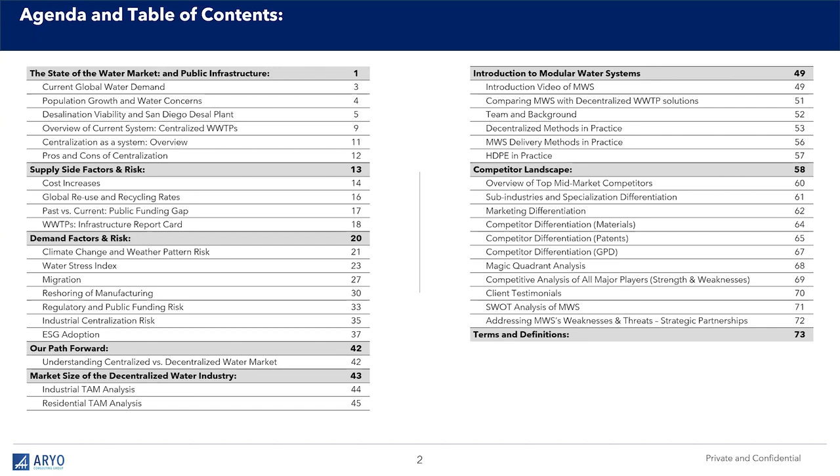Let's take a look. Water use is increasing at exponential rates. Water consumption is outpacing population rates. Why? Well, the fastest rising usage is in manufacturing. Population is growing - you can see at the bottom here that we've gradually gone from 2020, 8 billion, and the growth is slowing, but manufacturing is growing fast. You can see how agriculture has actually been dropping in terms of overall share, domestic only growing very slowly, electricity use growing somewhat, but manufacturing really taking off. So that's really the area of highest demand, and of course, it's where we're operating.

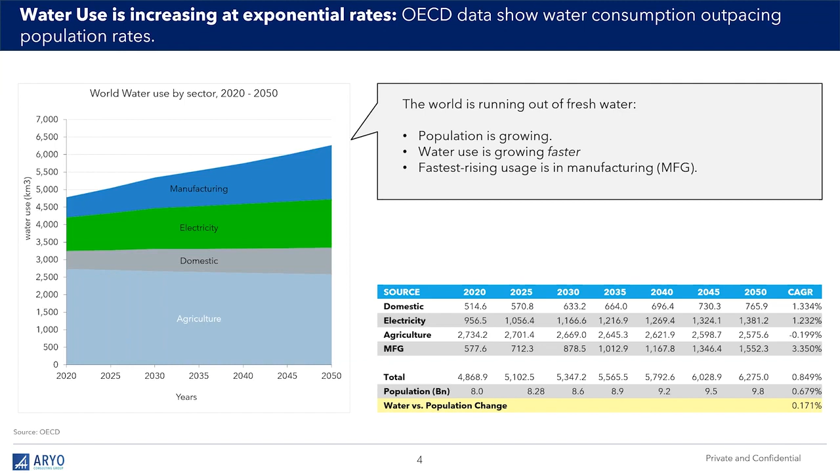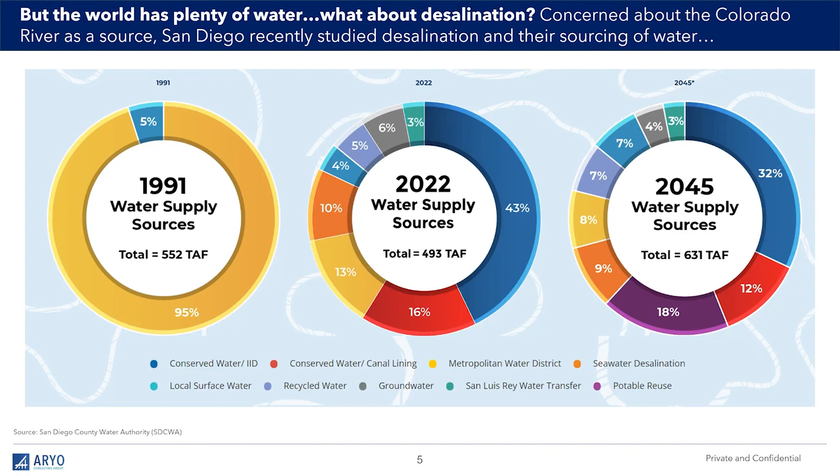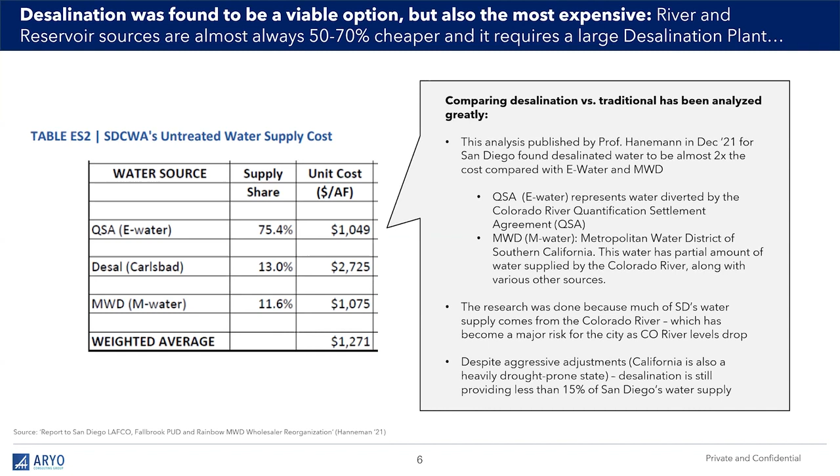However, here's the issue - the cost is very high. This slide says desalination is still providing less than 15% of San Diego's water supply, despite aggressive adjustments. As you can see, the cost per acre foot, that's 1 acre, 1 foot deep, is more than double for desalination versus Metropolitan Water District or QSA, which is the Colorado River source, which is 75% of the system. The desalination plants are very capital intensive. Here's the Carlsbad - it cost $1 billion to build, and it costs $100 million a year to run. We can't have dozens of these, not easily.

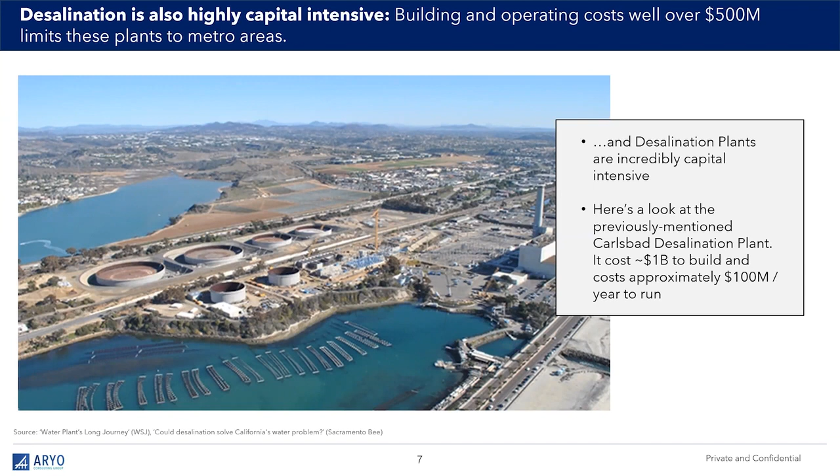Well, we can, but the federal government's not spending money on water, and states don't really have the cash. It really only works for Middle East and North Africa states, where they're both wealthy and drought prone. You see, Saudi Arabia has a huge percentage, UAE, Qatar, Bahrain, Kuwait - they're all big users. They can afford it, and they have a desert, so that works for them. Plus, I might add, they don't have a NIMBY problem, right - not in my backyard. The Huntington Beach desalination plant that was worked on for a decade was then canceled because of neighborhood problems. Well, that's not a good business model, right? So that's desalination - it's not a simple solution.

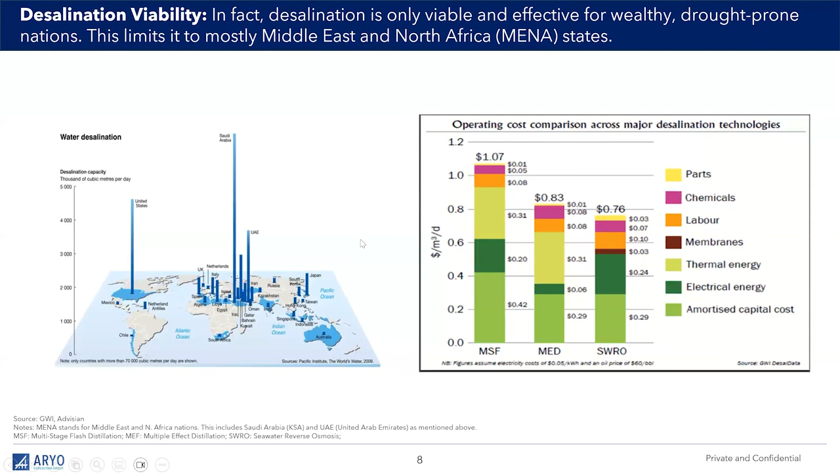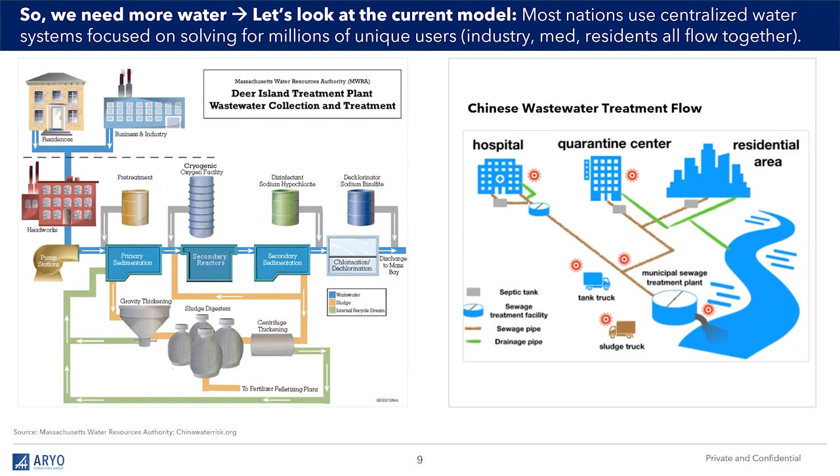There's better options - like, for example, what about recycling? We'll talk about that. So we need more water. The current model is centralized. I'm not going to go too deep into this, but basically everything flows into a municipal sewage treatment plant, and that kind of solves it for millions and millions of users - resident, industry, etc. This is the complex process, tried and true, adopted standard for all water treatment, and it's very stable. Remember that back when we first got into water, we started using a technology coming out of the algae industry, which is solids extraction, meaning originally algae extraction turning into sewage extraction.

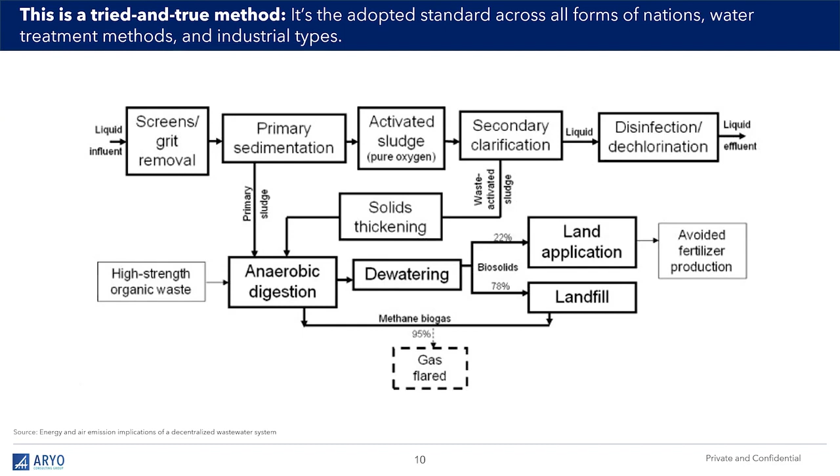We were technology focused, and we found that the water industry is very happy with this. They don't need new stuff. They're like, this is fine. And that's why we had to go to a more market-driven model.

Now, centralization comes at a cost. Why? Well, the direct costs are less, but they don't adapt to change, and they're very fragile. And that's where we see these things like Flint, Michigan, et cetera.

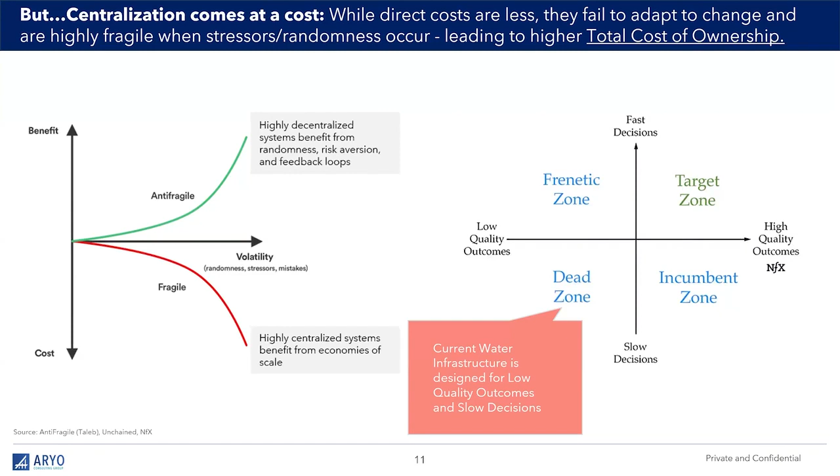What you get is this magic quadrant on the right here, showing that current water infrastructure is designed for low quality outcomes and slow decisions. So yes, on the left-hand side, highly centralized systems benefit from economies of scale, but they're very fragile. Whereas on the highly decentralized system, you benefit from randomness, risk aversion, and feedback loops. Basically, you have fast decisions and high quality outcomes. And frankly, when it comes to public health, that's what you want.

This goes on about the decentralization versus centralization mix. Again, centralized is theoretically lower cost, but decentralization is more responsive to market needs. So you see that the more you decentralize, the more you are responsive, right? Centralization's cost benefits stem from having one touch point. However, anything that naturally requires many touch points ends up costing less via the decentralized process.

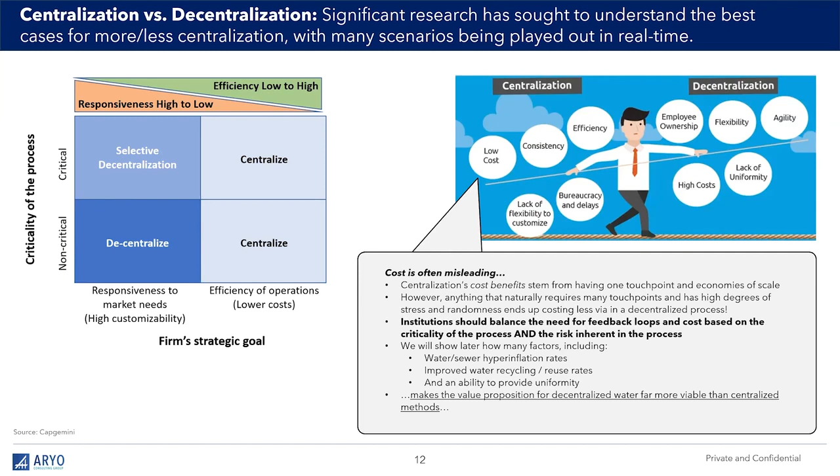Factors like hyperinflation rates, water recycling, and an ability to provide uniform standards makes it much more viable to go decentralized. All right, let's take a look at water centralization, of course, is the big model.

And this is what's called a Pareto distribution. The Pareto principle states that for many outcomes, roughly 80% of consequences come from 20% of causes. Like, for example, 20% of your sales force generates 80% of your sales. That's kind of the same concept here.

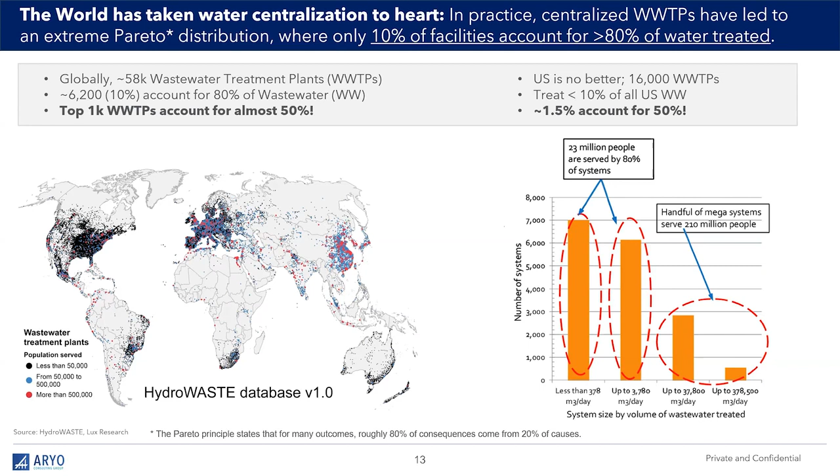Worldwide, we've tended to build very large centralized plants. Look at China with all the red dots. Look at Europe, America. On the right-hand side, America, at 1.5% of all plants account for half of all water treatment. And 23 million people are served by 80%.

Here's what's going on. Up 200% since 2000. And I've been talking about this: college tuition and fees. Literally, water and sewage rates are now exceeding college tuition and fees in 2023.

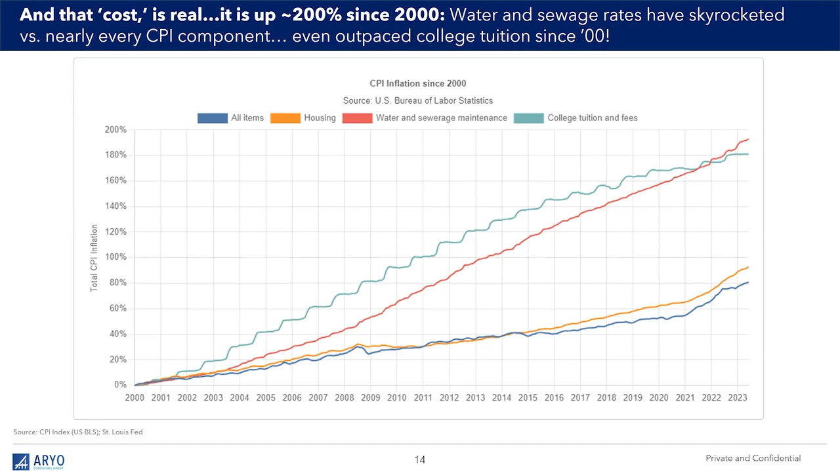This is insane. This is a bit technical, but basically it gets into the typical use, which is you don't see much reuse. There are some planned reuses, but the de facto is basically what actually happens, which is a very small percentage. I'll get to that in one second.

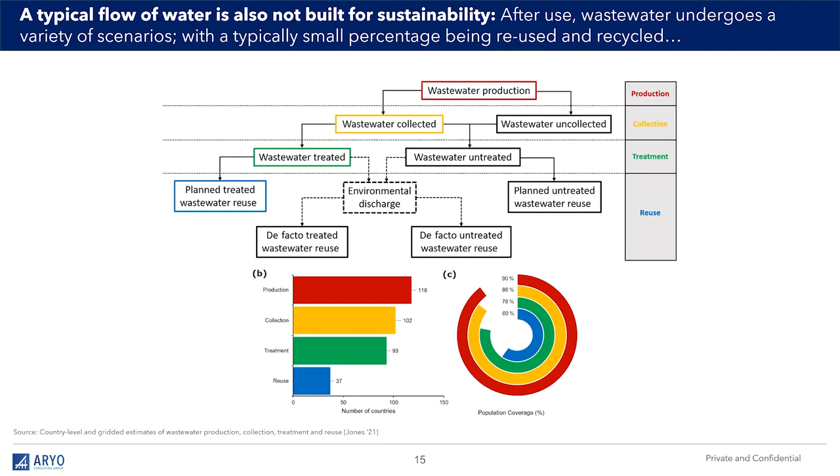This is a bit geeky, but it's kind of fun. This is the water recycling. Look at this. The black column is the internal freshwater resources per capita, and that is how much water is available and used by individuals. So Australia and the United States are very high, but look at the white squares, that's how much they recycle. Look at the United States.

Whereas if you look all the way over here at Israel, very low water usage, super high, 80% plus on the water reuse. That's the correct model. And they've achieved it.

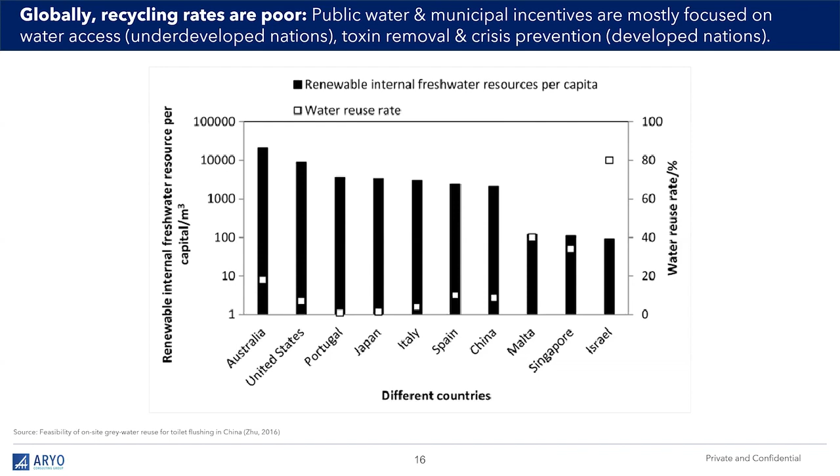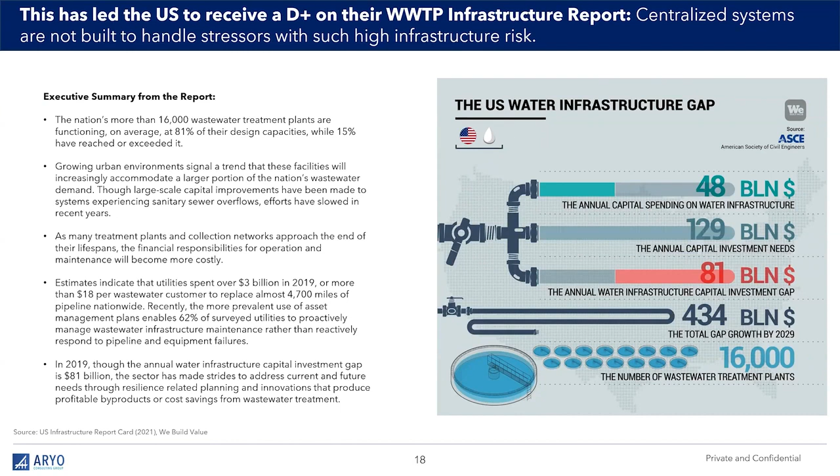Five major supply concerns - we'll get to the demand concerns. The five major supply concerns are centralization, single point of failure, massive increase in cost, less than 1% recycling, and a crumbling infrastructure given a D+ score.

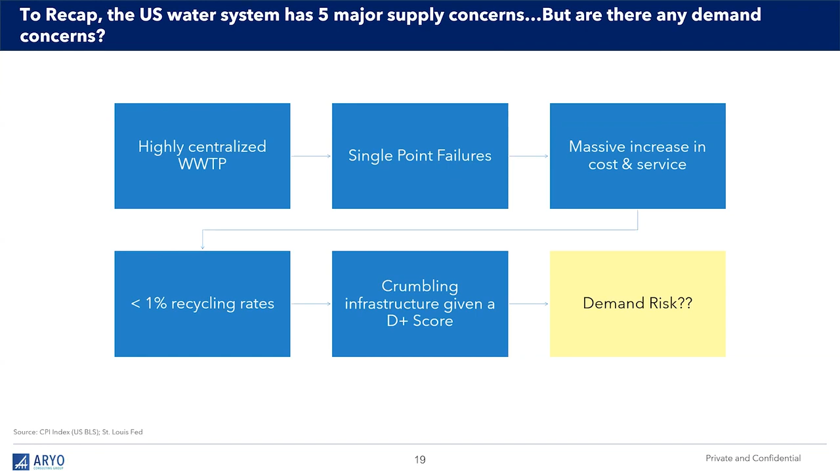So here we go. On the supply side, we have problems with climate and weather patterns, which I got news for you, we are having - disaster events are increasing constantly. These figures don't lie. We can debate the reasons why and all that. We can debate how we handle it.

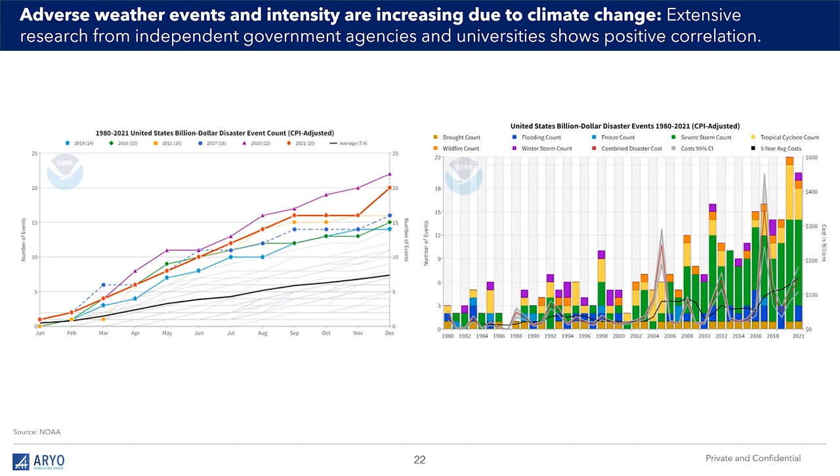That's very political, but that's a fact. Now, what's happening is this is really dramatically affecting water. Water stress occurs when demand for water exceeds available amount.

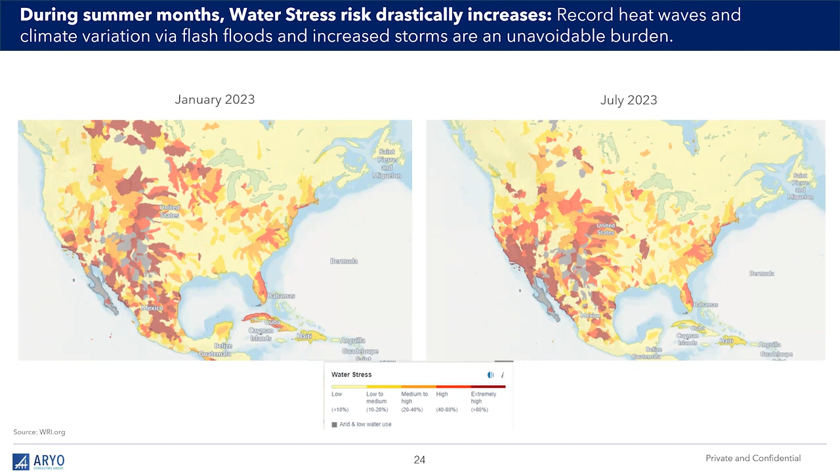And sure enough, we have a big, growing risk in the United States. Take a look at this: January of 23 to July 23, water stress. But take a look at where it's going. If we have business as usual by 2040, take a look. Here in January, you saw how the West Coast had very little water scarcity. But by July, and that was because of the big rains we had, by July that was bad again, right?

Now take a look at 2040. Here we have bad all over. It's pretty horrendous. Change from the baseline right here shows you the darker red is 2.8 times or greater increase in water stress. Very bad news.

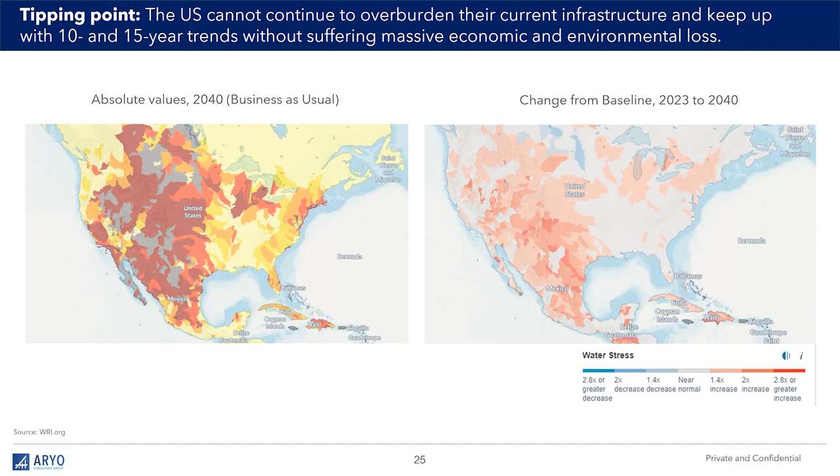And you don't want to be in Haiti, by the way. It's a very bad place. It's being, Haiti, Cuba. Florida's not too bad. But look at the Midwest and the West, Lord.

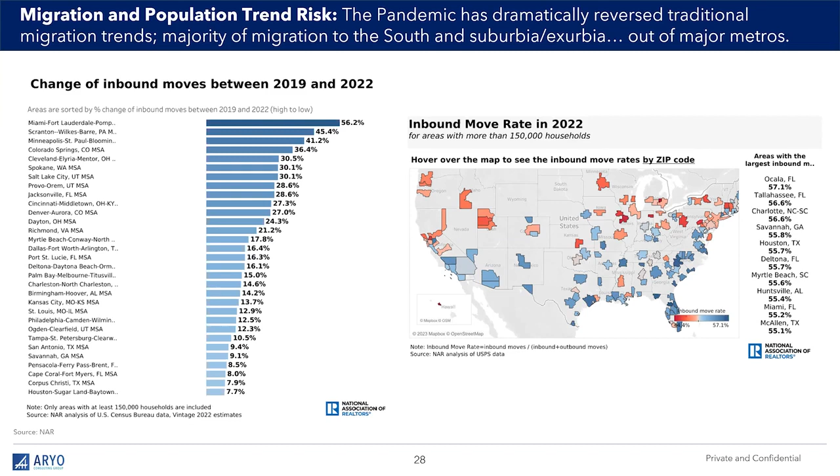Take a look at how we have migration from metros to the suburbs. And so we have growth of, inbound move rate is on the right-hand side map is blue. The exodus is in red. And this is a fascinating chart, but it shows that things are changing. What's happening is migration to the south and to suburbia and exurbia, meaning semi-rural, where there is no real infrastructure.

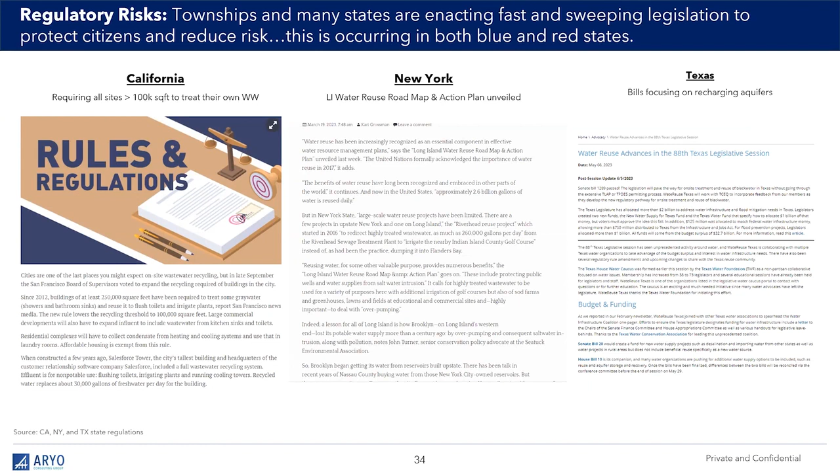Regulation: townships and many states are enacting fast and sweeping legislation to protect citizens and reduce risk. Absolutely. But this is creating expense for industry.

And finally, stressors to a centralized system almost entirely affect industry and agriculture. Why? Because they are 90% of water consumption. So increased water rates is a threat. ESG: you only get an advantage if you are doing your own treatment and reuse. And finally, lots of regulation. So wastewater treatment plants don't get attention because there's not a lot of voters in a wastewater treatment plant.

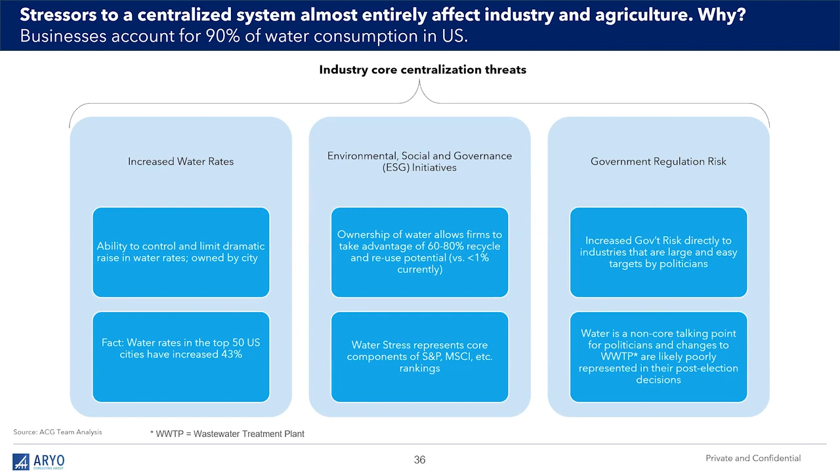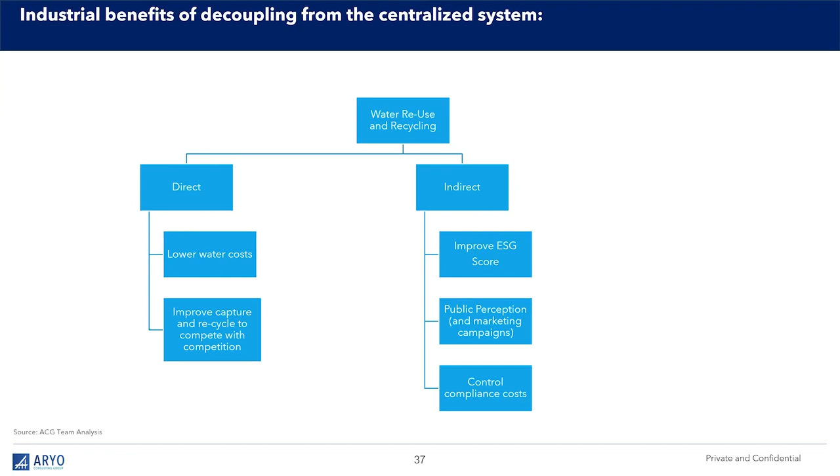Industrial benefits of decoupling, of course, are direct on the left-hand side, both in lower water costs as well as more recycling. On the right-hand side, we have ESG score, environmental, social, and governance score increases. And again, you might or might not like ESG, but it is a financial factor, and corporations get better funding, cheaper money if they are ESG compliant. Public perception, and of course, they can control their compliance costs.

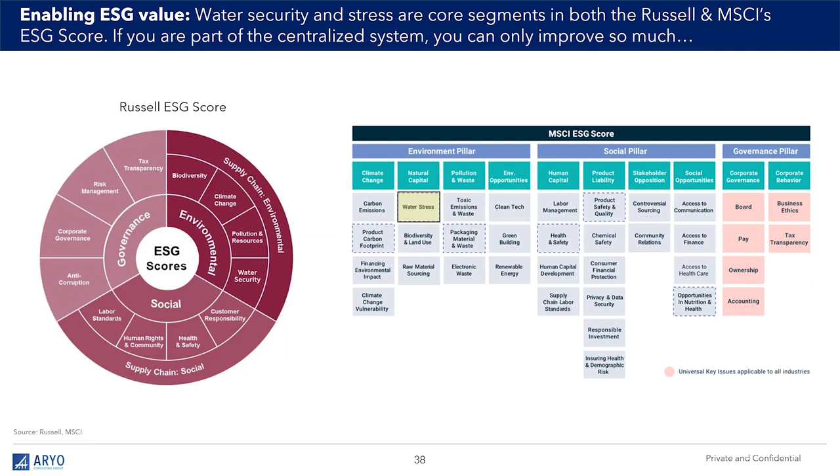Okay, there's this ESG thing. I won't get into it, but basically, water stress is one of the environmental, it's part of the environment pillar for ESG. And assets under management are growing fast, and that's what makes ESG very, very important. 20% of investment will be ESG compliant.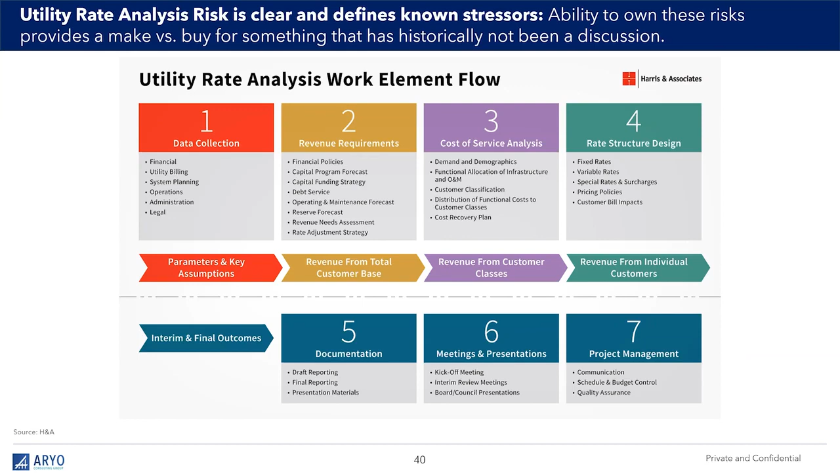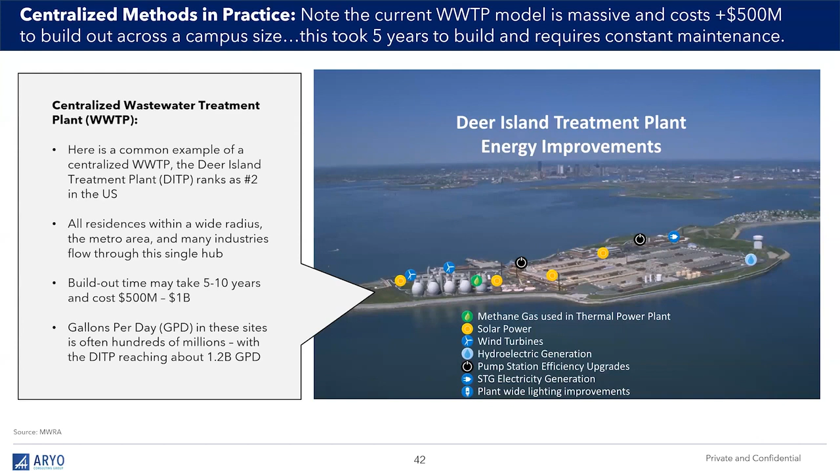Here's an example of a typical Deer Island treatment plant, number 2 in the US. It cost vast amounts of money, and the gallons per day in the case of this plant is 1.2 billion gallons per day. That's huge. It serves all these locations, but the problem is all these communities have vastly different needs.

This is in central Massachusetts and also on the coast—Quincy, Boston, Nahant, Cambridge, and so forth. All these areas are very different, so you're trying to do a one-size-fits-all for 2 million residents. Centralized wastewater treatment plants rely on expensive teams because it's highly expert work. And what if a township doesn't have the resources because it's too small? Well, they're in trouble.

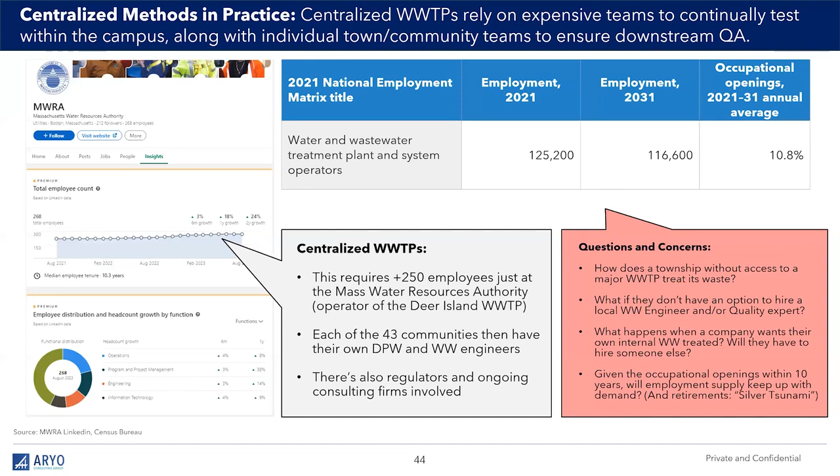Climate risk—much more adaptable. Migration trends—able to drop in place when booms occur. Same thing with reshoring manufacturing trends. It can adapt to new regulations faster than bills can become law, which is good, and it's built for decentralization, highly adaptable, et cetera.

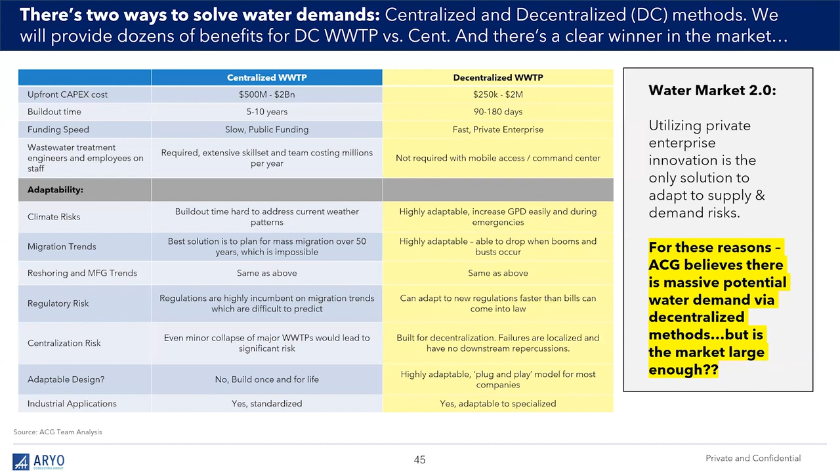So that's why ACG believes there's massive potential water demand via the decentralized method. But is the market large enough? That's a very good question.

All right, total addressable market. The analysts worked with us to look at the markets where residential—both fast-growing municipalities and mobile home parks—food production, campgrounds, miscellaneous manufacturing, government embassies, and military, where we have a big presence, adds up to a total market size of 64 billion. The total addressable market is 290 billion.

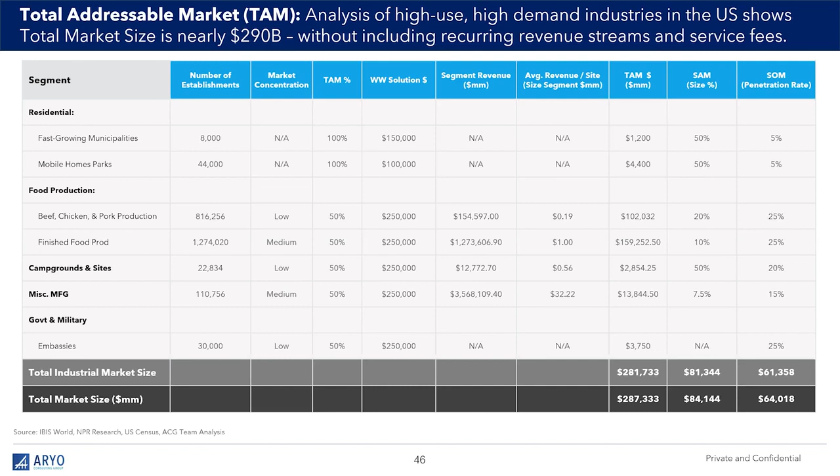The serviceable addressable market is 84 billion, and the penetration rate, the serviceable obtainable market, is 64 billion. There's a graph I'll show you later on that. And best in breed residential—that's worth billions right there.

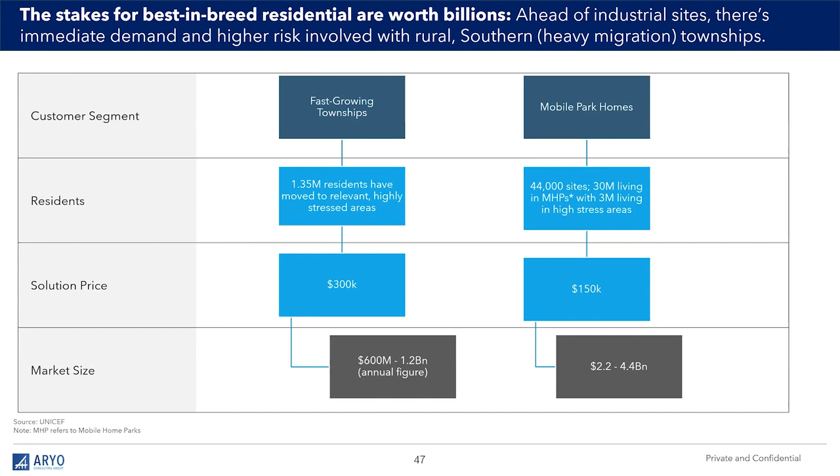Fast growing townships and mobile home parks—and that's an error there, it should not be mobile park homes, it should be mobile home parks. But nonetheless, by fast growing townships we also mean housing development. So we have the total available market, the serviceable available market, and the serviceable obtainable market, which is the realistic one.

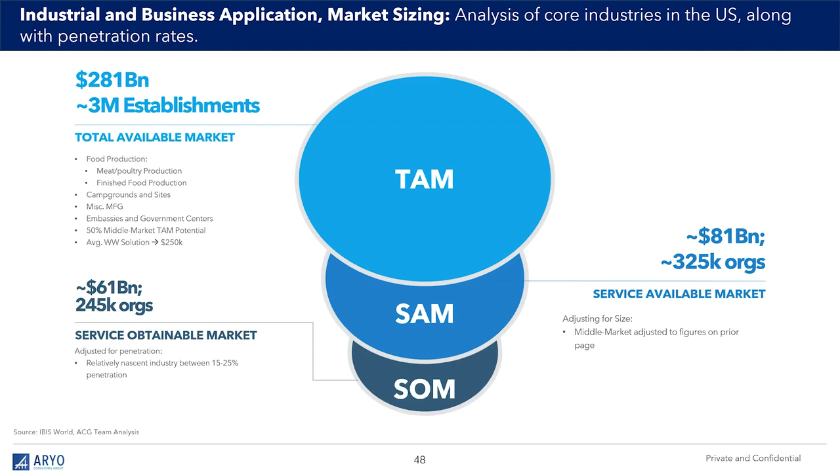You've got about 250,000 organizations—it's about a $61 billion market. I think we're okay with that. I think we're happy, we'll go with that. That's fine. All right, now here's a video I think you'll enjoy.

Gas stations, travel plazas, campgrounds—all those types of facilities, once you get outside the metro areas, are on their own as far as their water and wastewater utilities are concerned. Everywhere there are detached installations, it makes sense for them to have built-in black water treatment and the ability to recycle. They don't want to be in the utility business—they want to run their campground, their business.

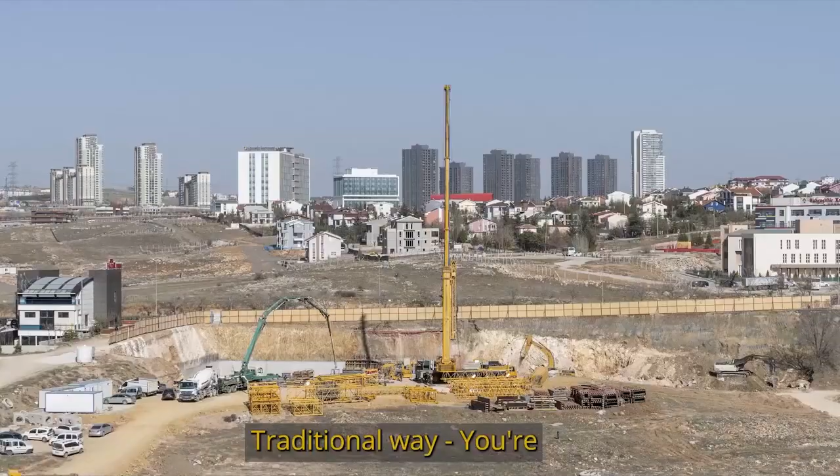Traditional way, you're looking at 2 years for construction, maybe up to 3, and then you have like a 20-year lifespan usually. These treatment units here are warranted for 50 years.

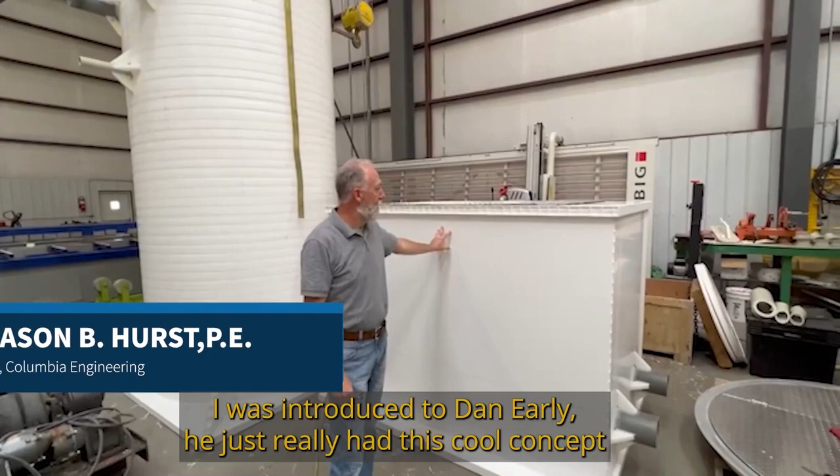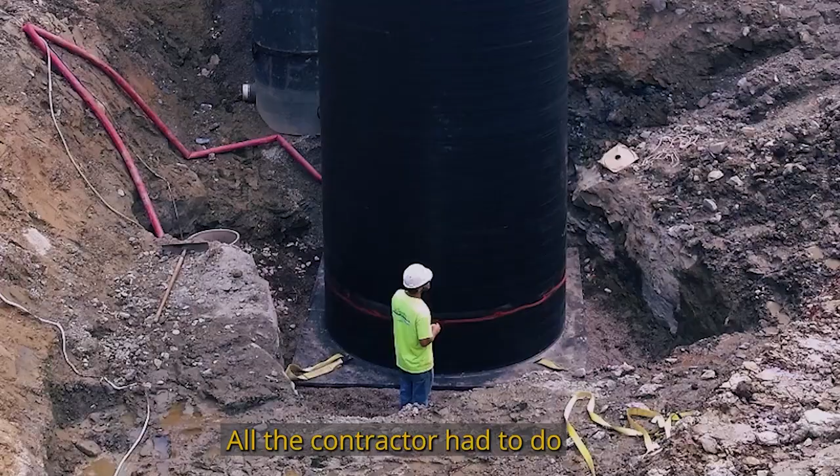I was introduced to Dan Early. He really had this cool concept of a turnkey package where they included all of the design and produced a modular plant that was shipped to the construction site, built to spec. All the contractor had to do is dig a hole, pour some concrete, set it, and plug everything in. It's a plastic tank that was dropped into a big hole cut into a 40-foot shipping container—very easy to send down the road.

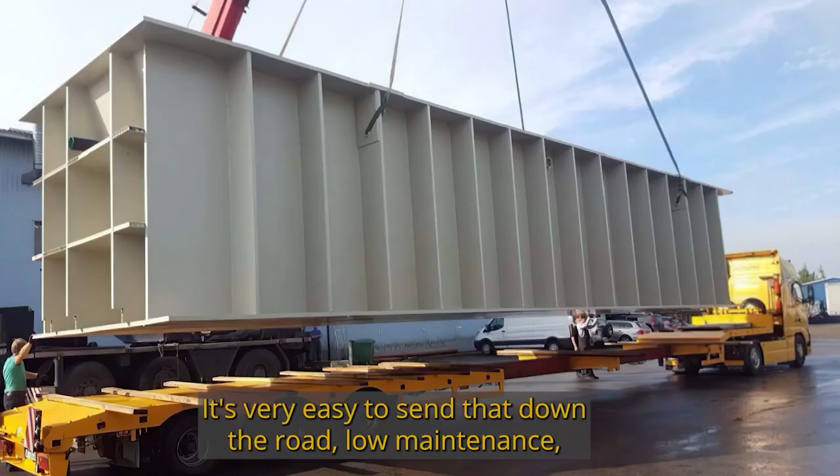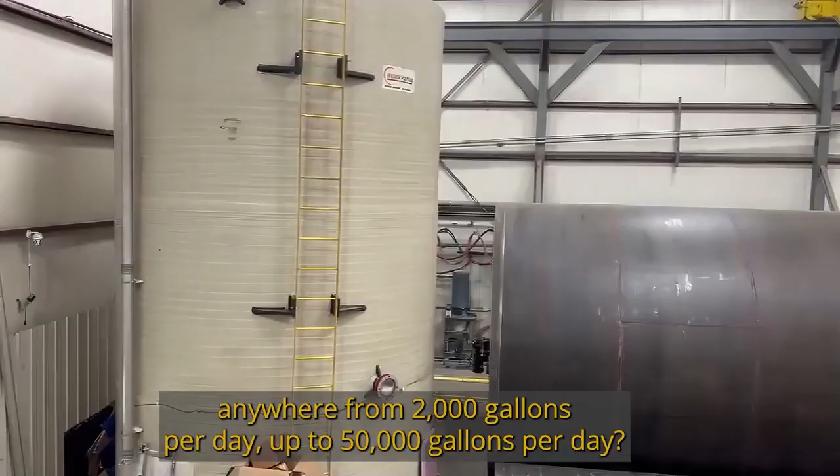Low maintenance, once or twice a month—there's very much that can be done remotely. Be able to take a pre-engineered, prefabricated solution that can handle anywhere from 2,000 gallons per day up to 50,000 gallons per day. Honestly, I was amazed. I was really looking for the easy button so that we can focus on doing what we do best.

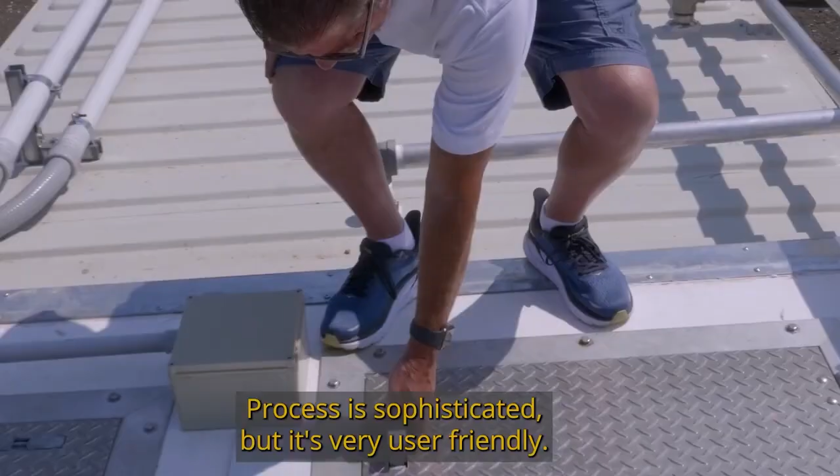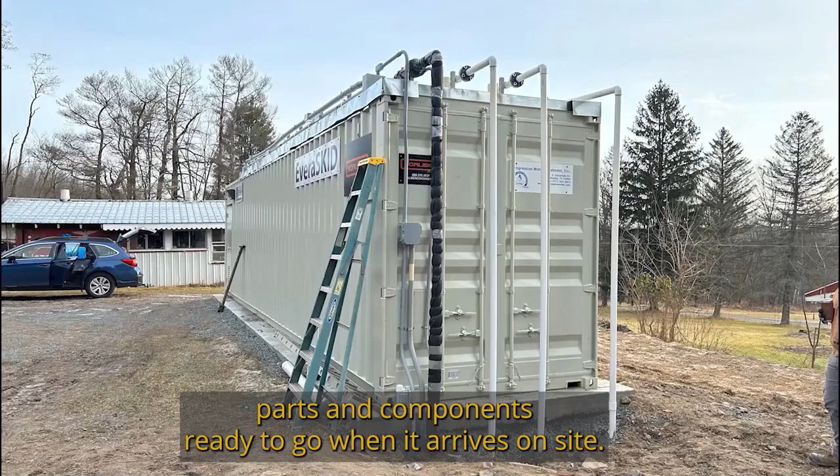The process is sophisticated, but it's very user-friendly. Did not expect to get the level of a complete package being delivered in a prefabricated building with all wiring, parts, and components ready to go when it arrives on site. Everything worked seamlessly, right on schedule, if not a bit ahead of schedule. The price was excellent. The fact that this was a pre-engineered solution was fantastic.

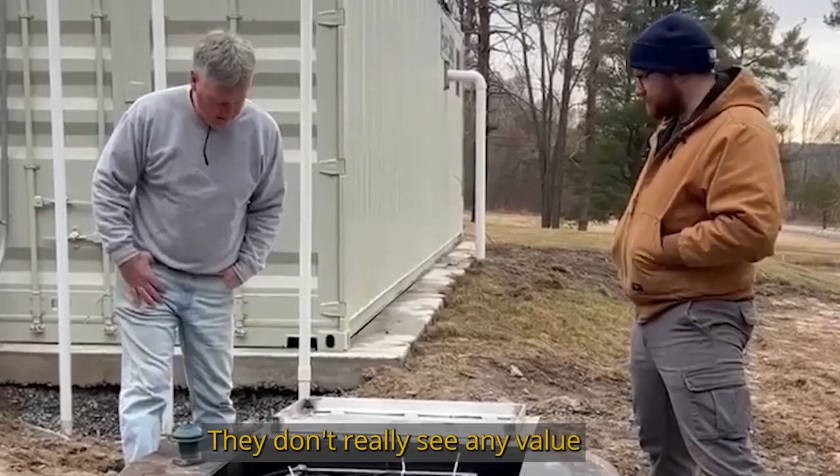A contractor could probably do this whole thing start to finish in about a week. They don't really see any value in looking anywhere else. Clean water was being produced within hours. The engineer that was there, as well as the service provider, were absolutely amazed. They had never seen this before.

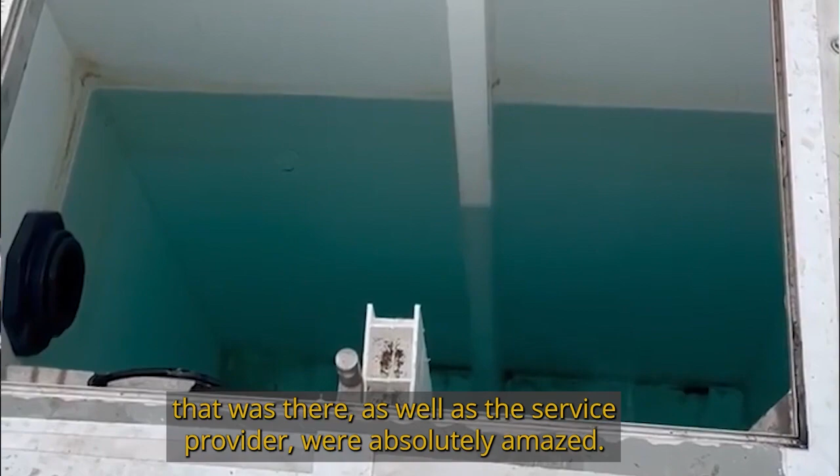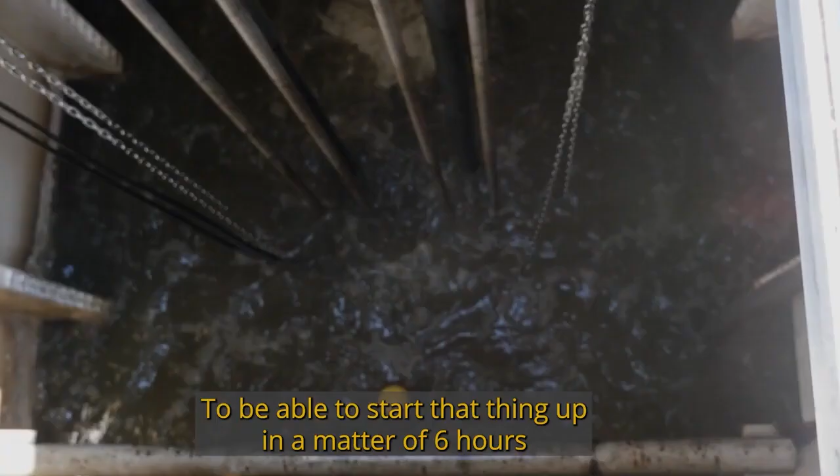Each one of the situations, whether we were in Thailand or we were in Djibouti, Mauritania, the delivery and the design were both simple yet sophisticated. Being able to start that thing up in a matter of 6 hours was incredible, and a real testament to the design and the engineering that Modular Water puts into their products.

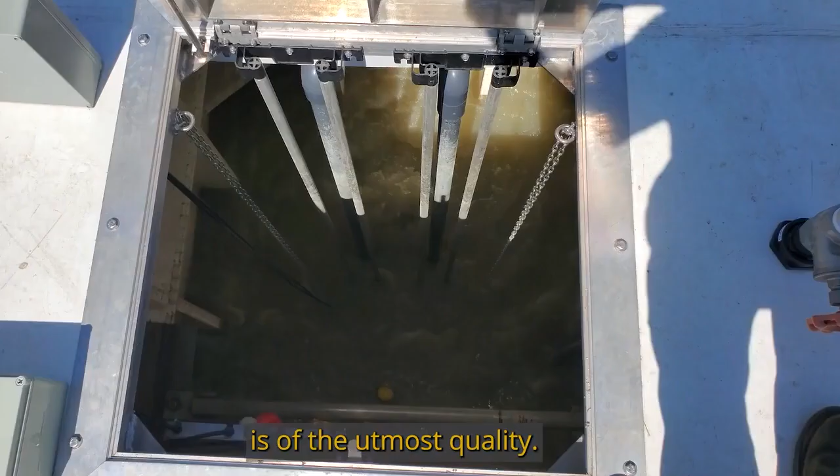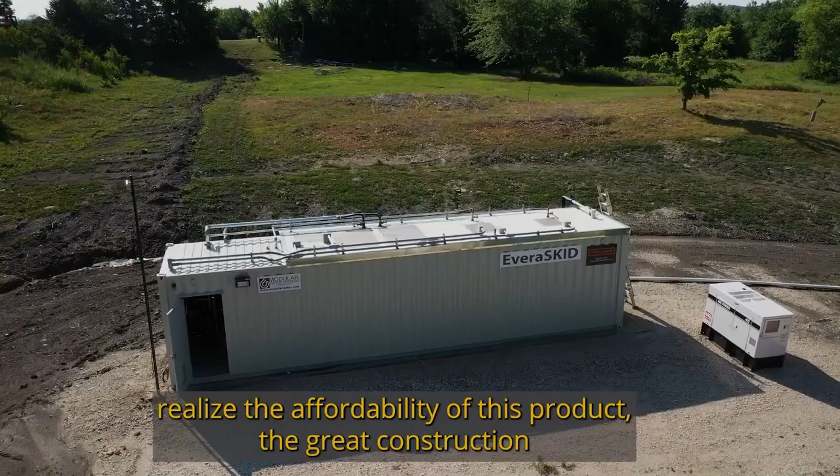The treated water that we produce from our systems is of the utmost quality. It has the appearance of almost being drinking water quality. Word's getting around on how efficient the production is and how pristine the water is. As the news of this spreads and becomes more widespread, public utilities and private landowners will realize the affordability of this product, the great construction and reliability of it, and the ease of installation. I think it's going to become much more prevalent.

It's been a great ride so far, and I cannot wait to continue the relationship with Dan and Modular Water.

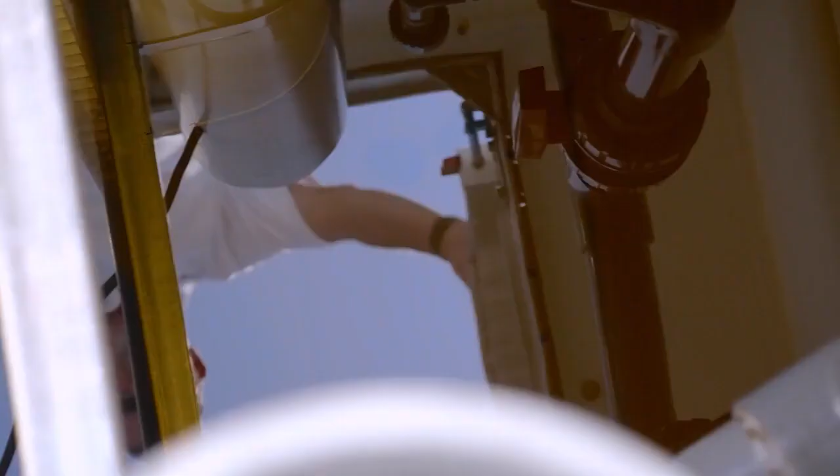So it's just like a miracle.

We're using HDPE, high density polyethylene, or polypropylene, depending on the temperature. Very flexible. Now, 50% of all projects are designated as basis of design due to the high degree of standardization and plug and play. Thus, the lifespan is 75 to 100 years. We're still relatively small - average number of FTEs, full-time employees, is relatively small, but we're fixing that. And of course, patents - we have patents, and others often do not.

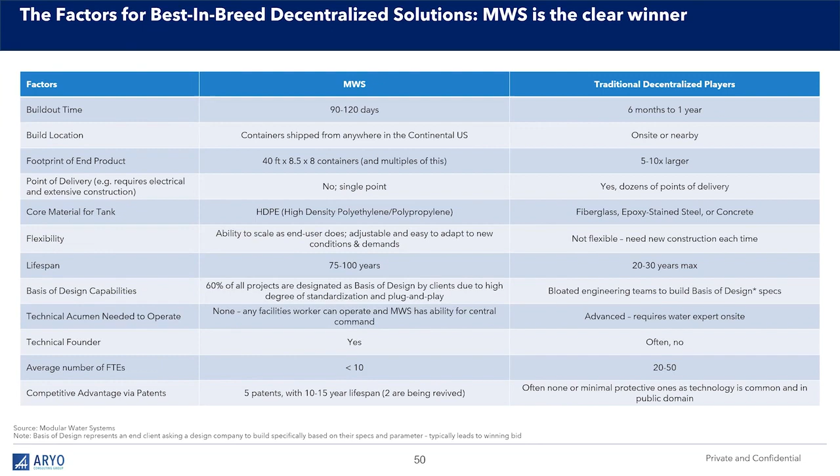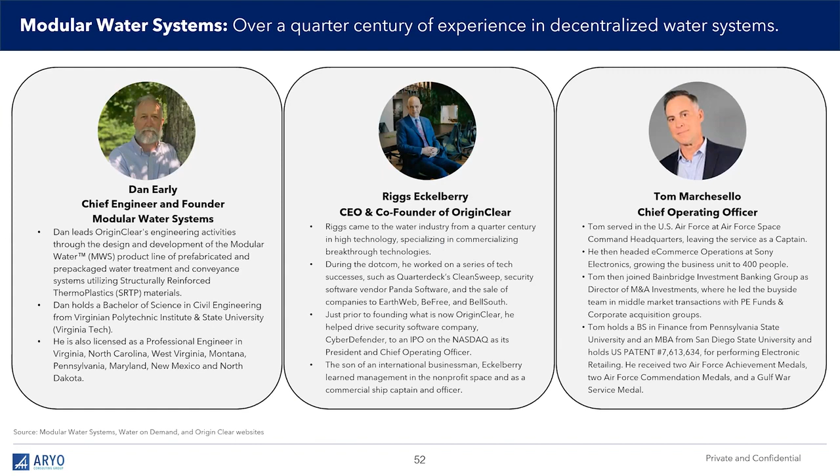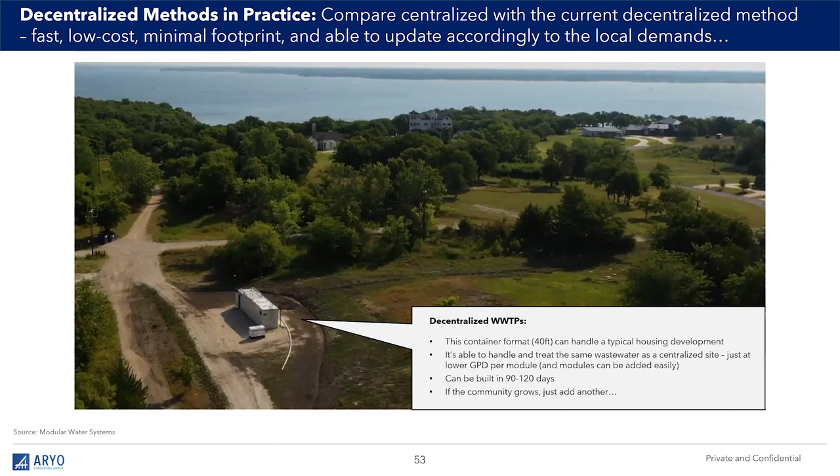Here's another illustration of how they grow just like Lego blocks, right? The installation is in as little as a day. They build the pad, you drop this in, connect it, you're done.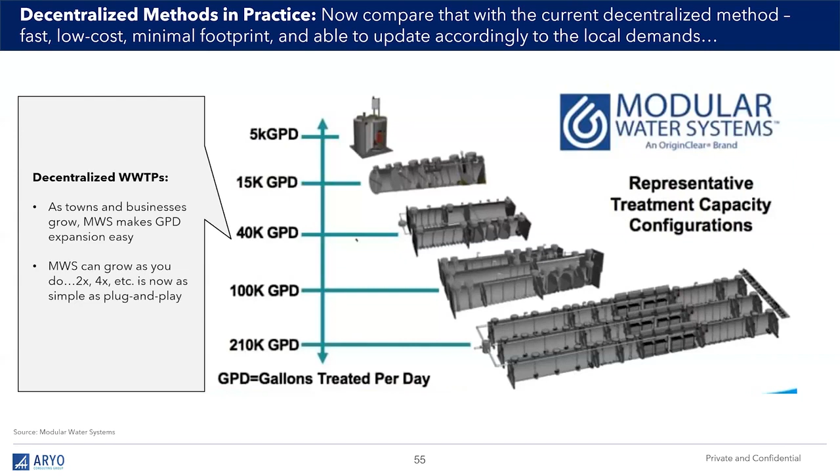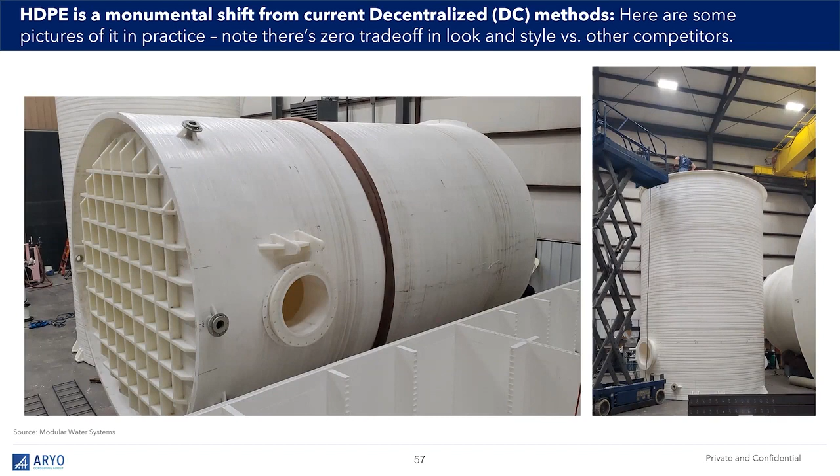The analysts like the look and style, which I love. This is very, very well built material. Compare it with concrete - takes forever to build. I was in New York City in the 80s when they were building the West Side sewage plant, and it took years. We just watched this thing grow and grow, and of course they had very little land, but they managed to find some on the West Side, and it took forever.

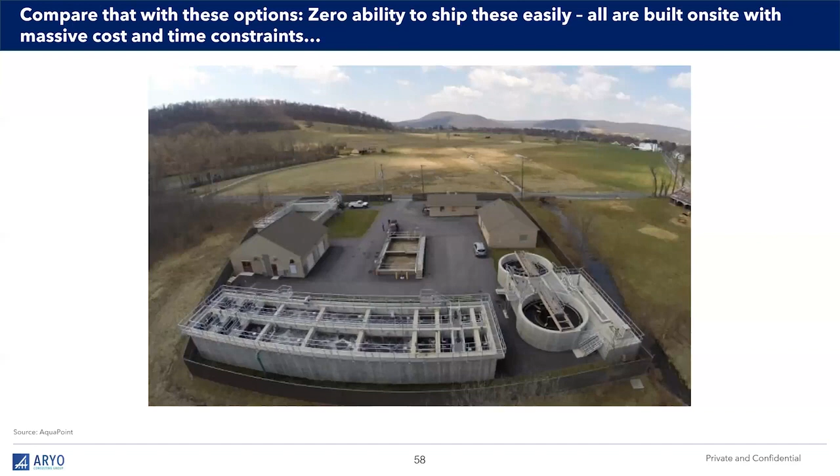I'm not going to play this video, but basically this shows box options in the marketplace. It's fun, but they're still cumbersome to ship. And then here, differences in players - so this analyzes all the different players, different price points, total cost of ownership.

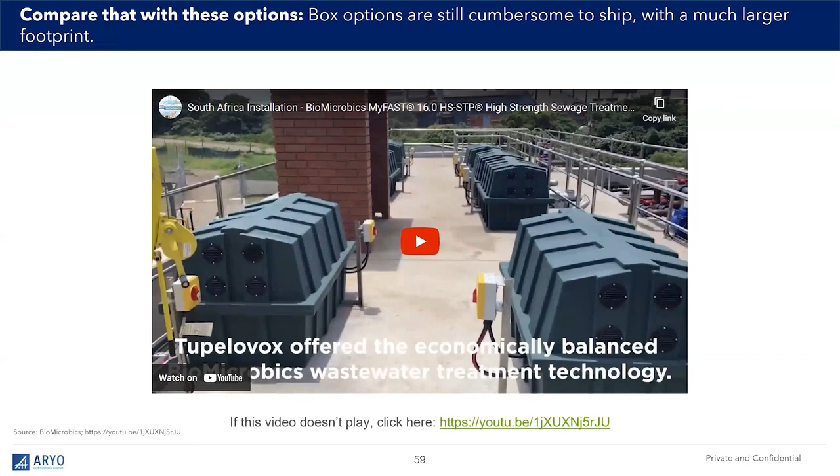There's another competitor, which is rotomolded plastic versus HDPE, high density polyethylene. The problem is they have the lifespan, but they have massive limitations. They're much smaller, and you have to build a mold for each, and molds are expensive. HDPE is the best overall solution. They say higher price, but actually we've become price competitive, and we have, of course, patents in the area.

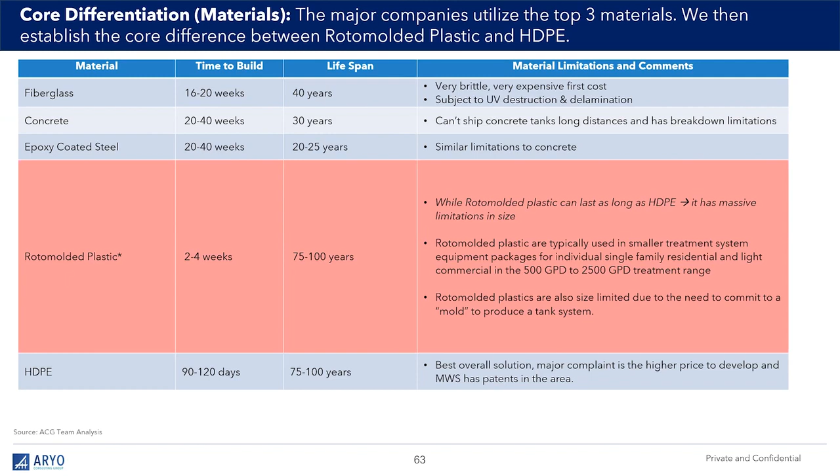And here is the core differentiation. We have a massive advantage in terms of time to build, which is much shorter, and the lifespan, both. So you get the product sooner and it lasts longer.

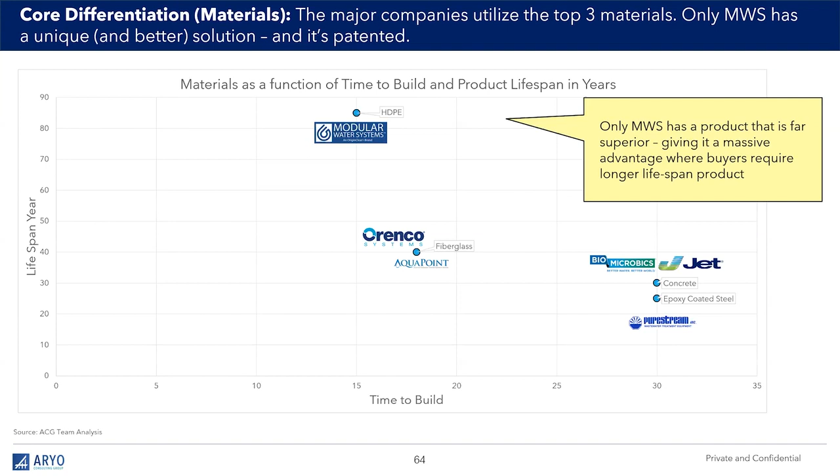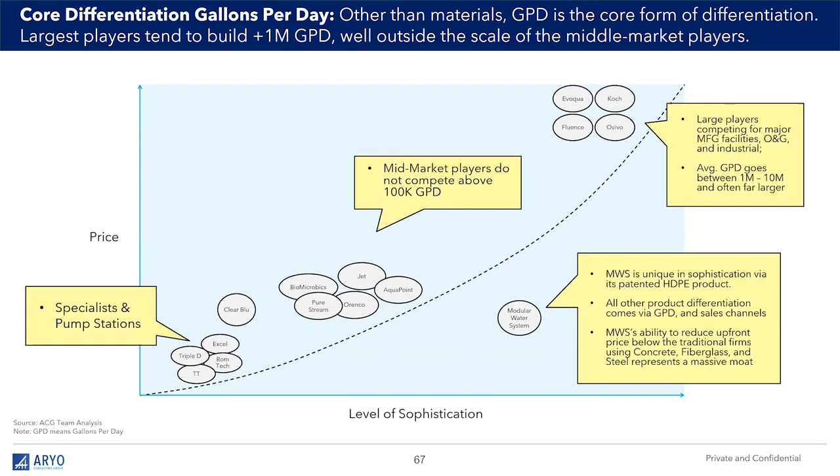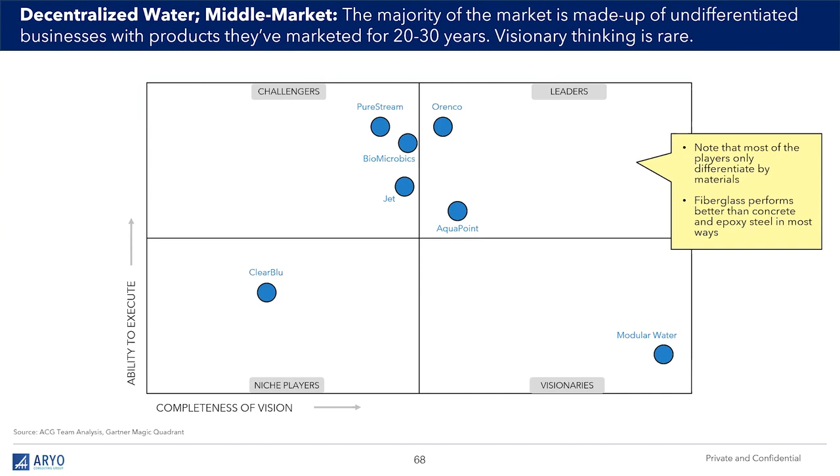This is the big thing going on, which Ken - if you don't know about it already - get briefed by Ken under NDA, and he'll tell you all about it.

I won't get into all the other stuff, but in general, by far the best materials and total product. Most buyers don't need something for 75 years, but it's attractive with price competitive. So they go, hey, I spend about the same amount of money and I get a 75-year product.

It's a win-win. All right, these are all testimonials that I won't go over. You saw the montage. These are clickable videos that people can play.

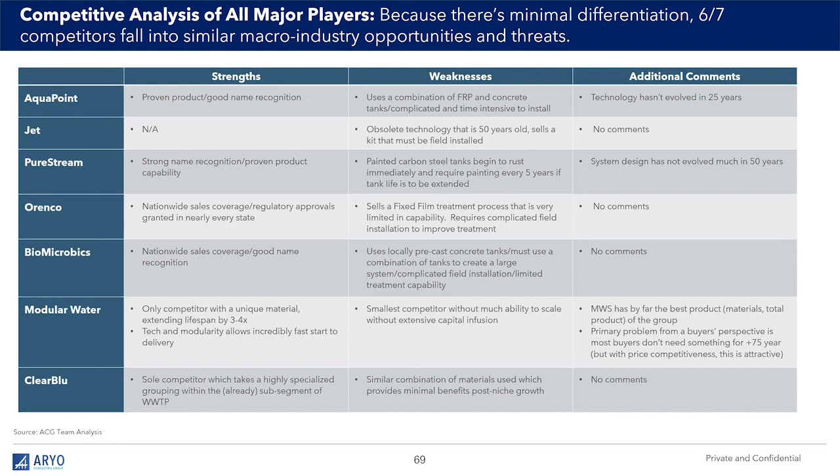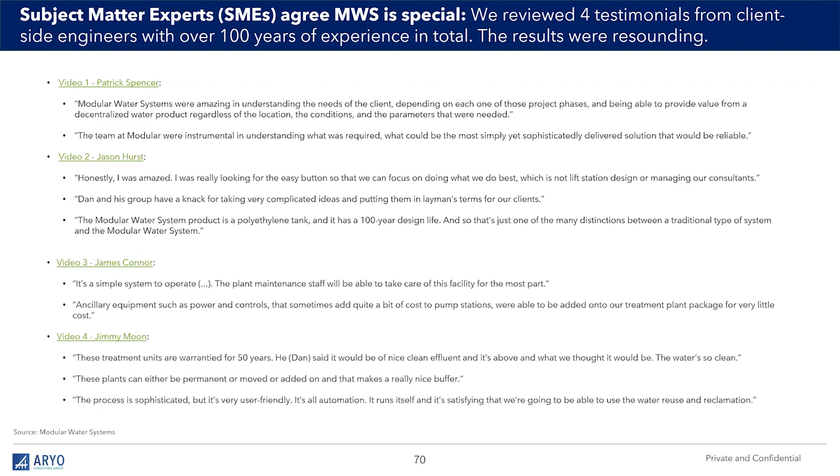Then we get into SWOT analysis - strength, weakness, opportunities, and threats. We're getting close to the end of the hour, so I won't go too deep into this. Basically, strengths are visionary, annual growth - about 4x annual revenue growth in the past 3 years.

Product strengths, opportunities - do more marketing, get more manufacturing going, get licensing going. Then over here on weaknesses, currently we're near capacity and we need to continue to staff up, as well as get our manufacturing going. We need to acquire some of these HDPE plants because of limited fabrication base in the US, but that's something we can deal with.

Again, scalability - when you have one guy selling, that's hard, but we can fix it. In terms of threats, large competitors maybe trying to get around the patents. International presence, we need to get in there. And it's a difficult product to sell directly.

We usually go through a middleman, which is our strength. And obviously, government and municipalities have different buyer needs. And the reason why we still sell to those people, even though we do decentralization, is because of the pump station business.

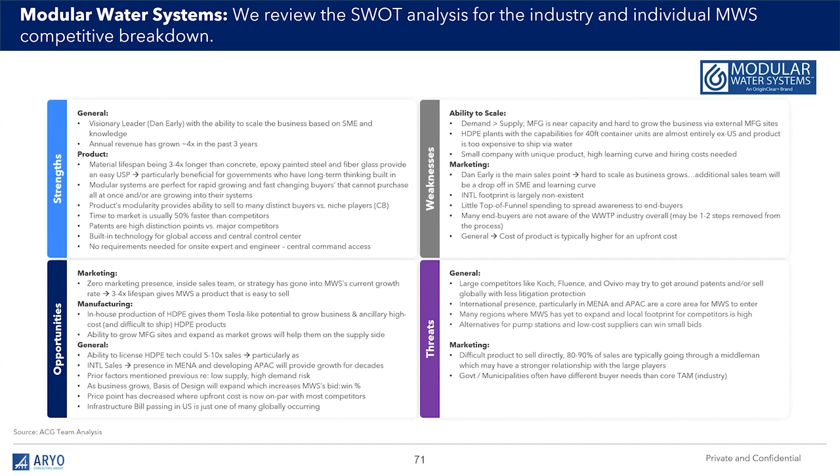Well, that was the presentation that I made in late August at one of my CEO briefings. And you'll see that it really was, for us, an extremely validating experience. So I thank you for watching it, and do stay in touch.